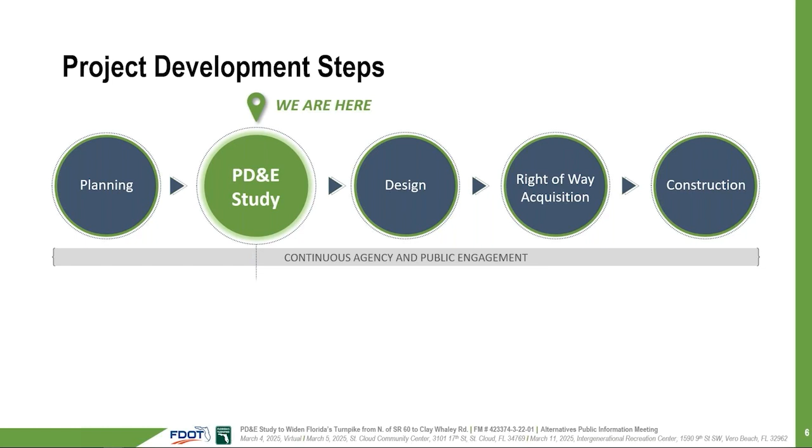The PD&E study is ongoing and is the second phase of FDOT's transportation project development process. Key components of the PD&E study include an evaluation of existing conditions, identification of future traffic needs, development and evaluation of project alternatives, and public and agency involvement. All findings and recommendations are documented at the end of the study.

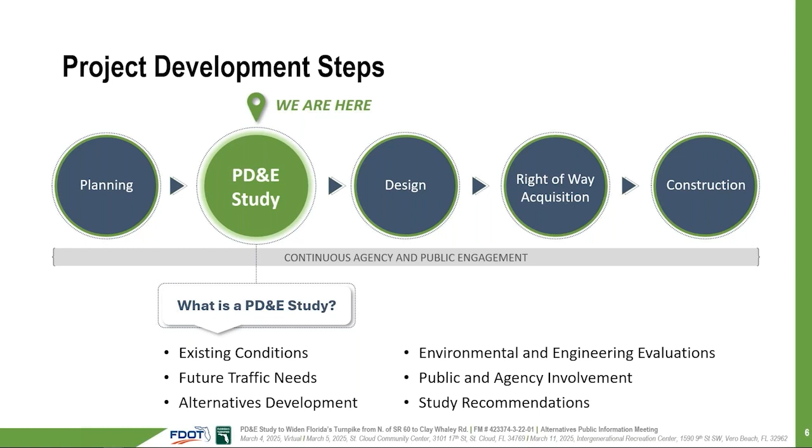Subsequent phases include final design and engineering, right-of-way acquisition, and construction. Right-of-way acquisition is not anticipated. The subsequent phases are currently not funded, but will be considered for funding upon the completion of the PD&E study.

This Turnpike PD&E study is located in Osceola County. The project begins north of State Road 60 and continues to south of Clay Whaley Road, from milepost 193 to 238.5, a distance of approximately 45.5 miles. The Turnpike mainline within the project area is currently a 4-lane limited-access toll facility, with two 12-foot lanes in each direction and a 40-foot barrier separating median.

The segment from State Road 60 to just north of the Canoe Creek Service Plaza is primarily rural, transitioning to an urban setting toward the project's endpoint. This section of the mainline features the Canoe Creek Service Plaza, passes through the Three Lakes Wildlife Management Area, and serves as a critical evacuation route for Florida.

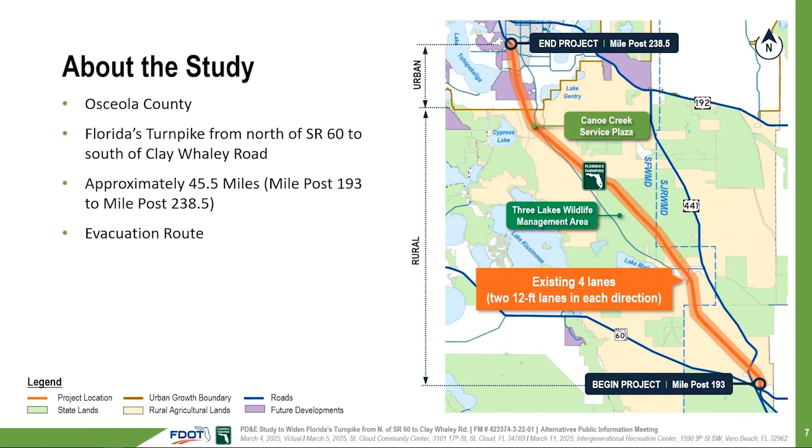This PD&E study is part of a larger network of improvement projects spanning both north and south of the project limits. Ongoing coordination with adjacent projects has been maintained and will continue throughout the duration of the study. This includes collaboration with the current PD&E study to the south, coordination with the Nolte Road Interchange Design-Build team, and a separate concept study that will analyze and document the potential location of a future interchange between Nolte Road and the future CFX interchange. Additionally, multiple coordination efforts have taken place with the Central Florida Expressway Authority regarding the potential future interchange for the Southport and Northeast Connector.

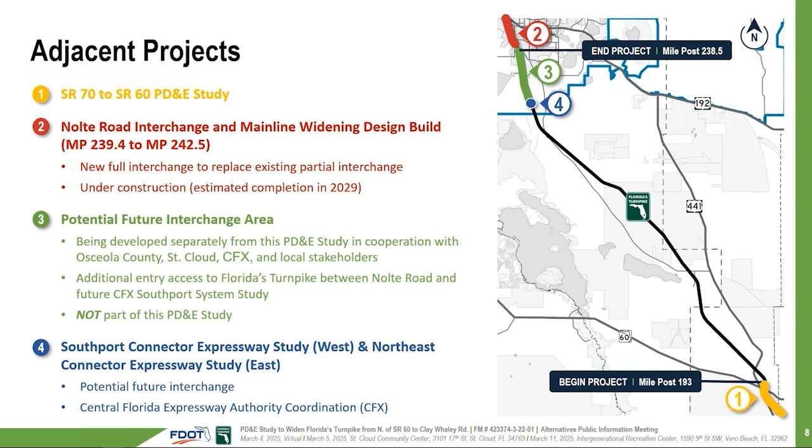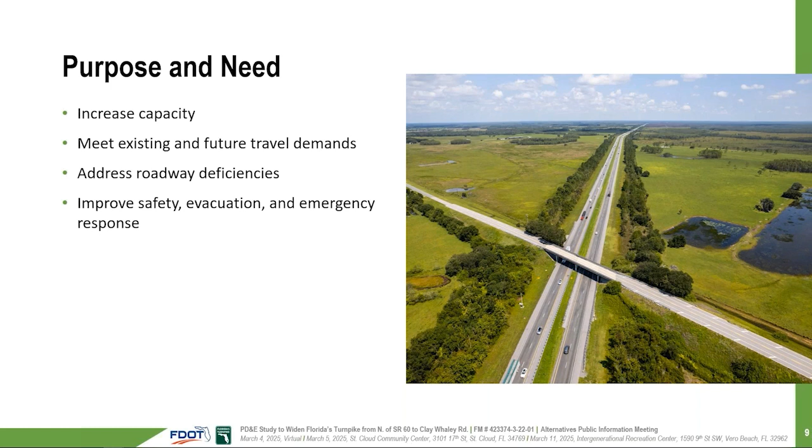The purpose and need for this study are to increase capacity, meet existing and future travel demands, address roadway deficiencies, and improve safety, evacuation, and emergency response.

An increase in capacity is needed to accommodate projected traffic volumes. In the rural segment, 3 lanes in each direction will be needed by 2045, and in the urban segment, 4 lanes in each direction will be needed by 2045 to meet traffic demands.

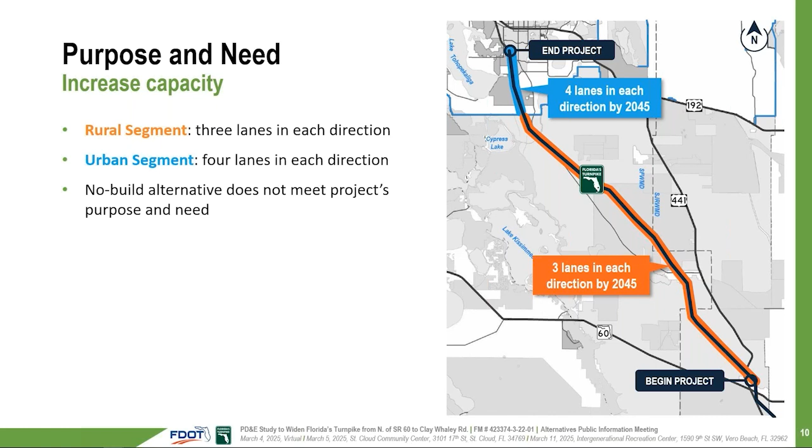The no-build alternative does not meet the project's purpose and need. If no improvements are made, an increase in the travel demand could result in more congestion and crashes.

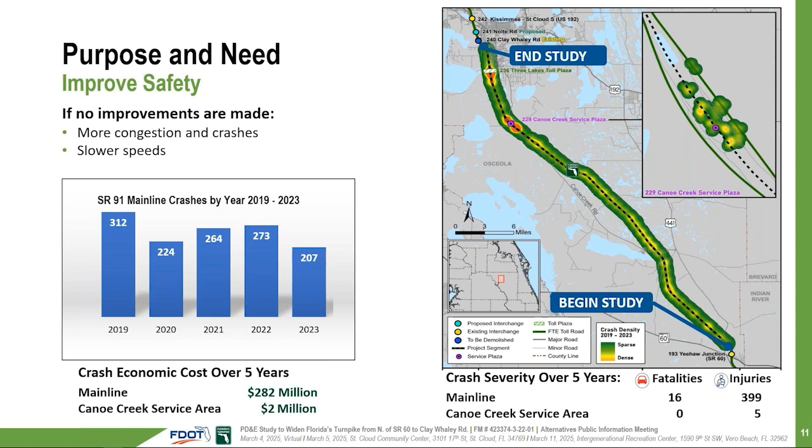Between years 2019 to 2023, there were 1,280 crashes along the Florida's Turnpike main line, which resulted in 16 fatalities and 399 injuries within the study limits. A total of 45 crashes were also reported within the vicinity of the Canoe Creek service area. The total crashes estimated economic cost within the study limit was about $284 million between years 2019 to 2023.

Florida's Turnpike serves as a vital component of the emergency evacuation route network, playing a crucial role in ensuring the smooth flow of traffic during evacuation periods. The enterprise is spearheading initiatives to improve emergency response times and enhance mobility during such critical events.

Solutions to address the project needs were developed and evaluated in coordination with the community, stakeholders, and local agencies' feedback, resulting in proposed improvements to the Florida's Turnpike corridor and additional structural and drainage improvements.

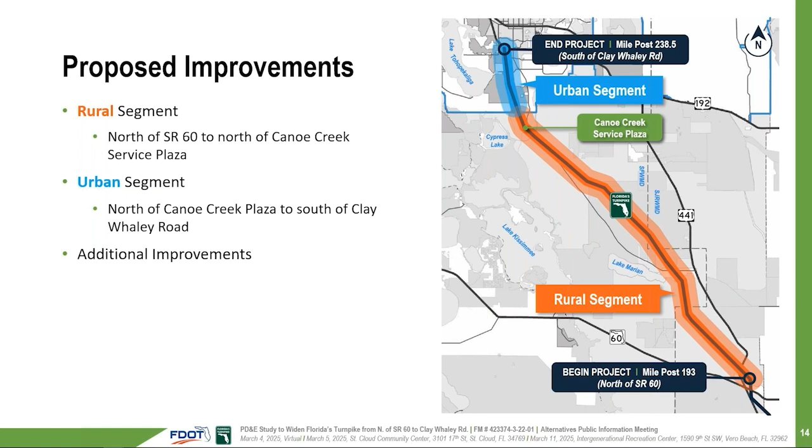We will begin by presenting the improvements along the rural segment from north of State Road 60 to just north of the Canoe Creek Service Plaza. Next, we will cover the urban segment from north of the Canoe Creek Service Plaza to south of Clay Whaley Road, followed by additional improvements throughout the project limits.

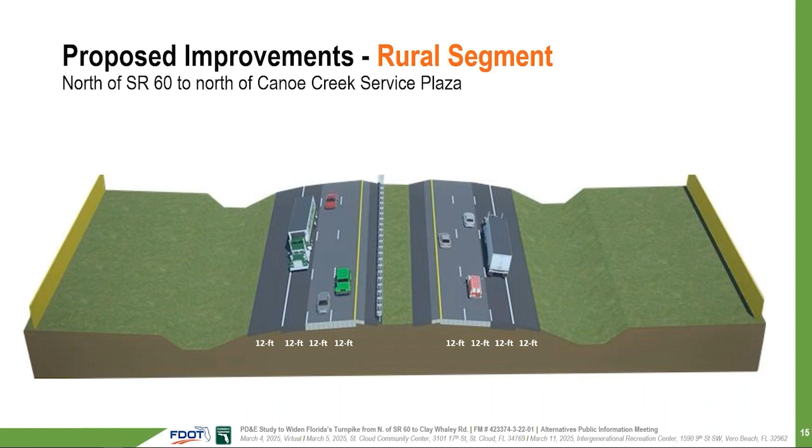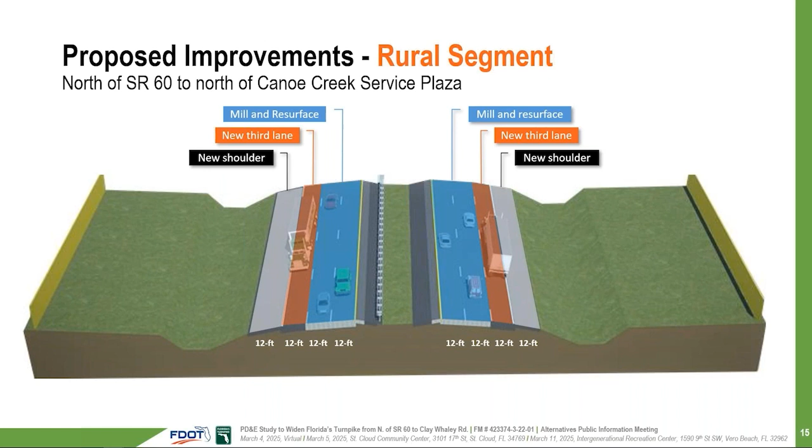The proposed improvements within the rural segment of the main line, from north of State Road 60 to north of Canoe Creek Service Plaza, include mill and resurface of the existing 2 lanes, addition of a 3rd lane in each direction, and the addition of a new 12-foot shoulder in each direction. The existing guardrail and median will remain the same. All improvements will be within existing right-of-way.

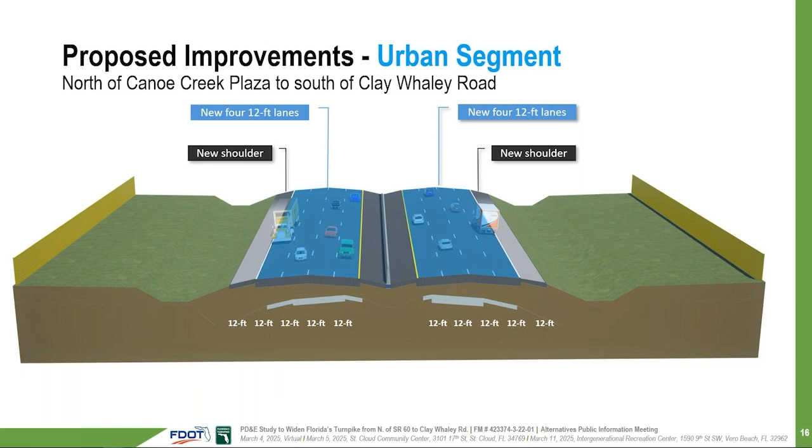The proposed improvements within the urban segment, from north of Canoe Creek Service Plaza to south of Clay Whaley Road, propose reconstruction of both directions of the main line to include 4 12-foot lanes in each direction, the addition of a new 12-foot shoulder in each direction, and the reconstruction of the median to include inside shoulders, a barrier wall separation, and drainage improvements. All improvements will be within existing right-of-way.

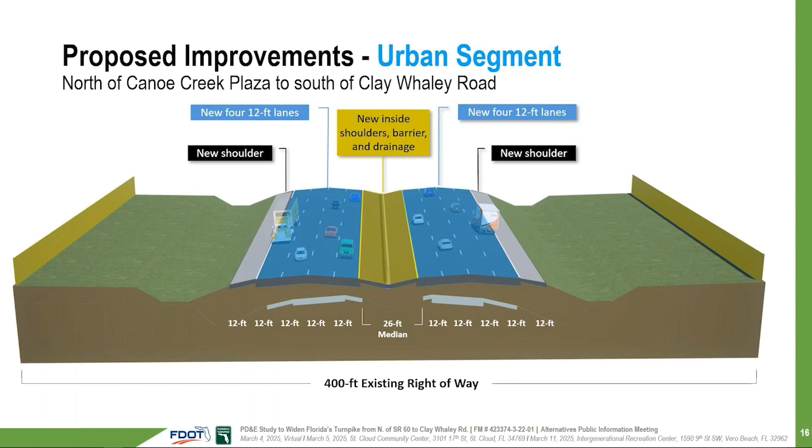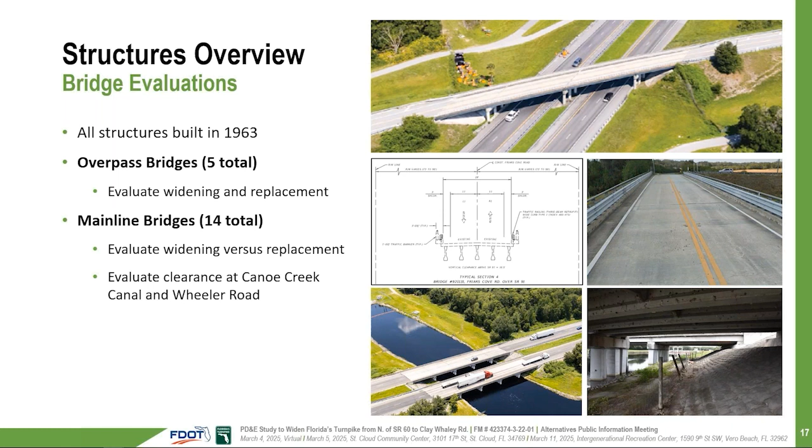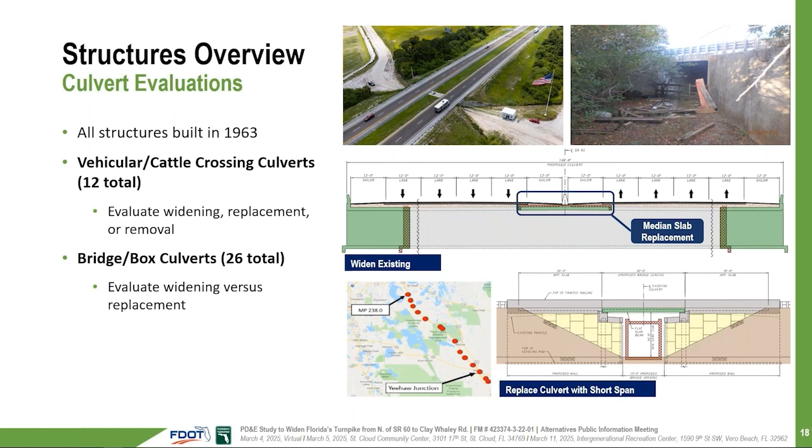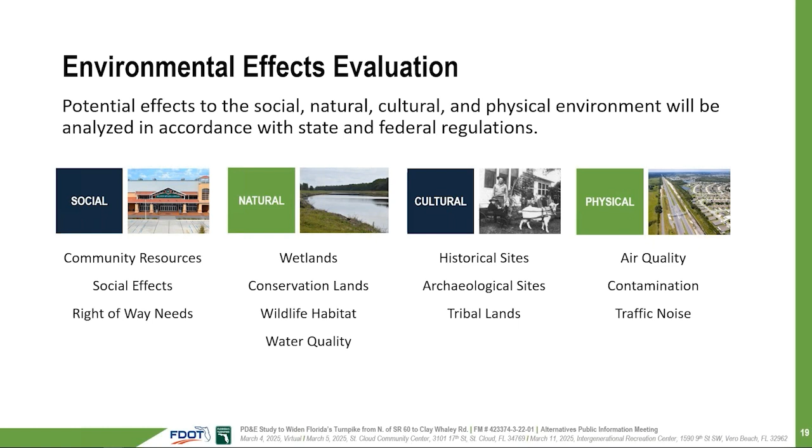The PD&E study is also evaluating the potential impacts and benefits to the social, natural, cultural, and physical environments associated with each alternative. Avoidance or minimization of impacts to these features is a key consideration.

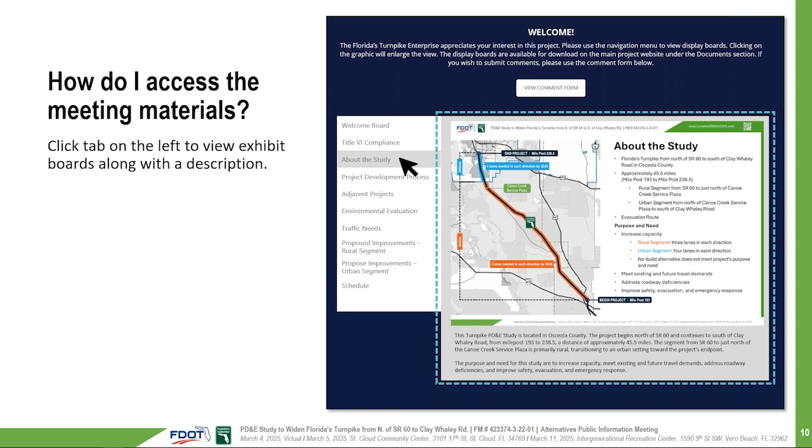Contact directly through email at greg.moore@dot.state.fl.us or by mail at P.O. Box 613069, Ocoee, Florida 34761. While written comments and questions are welcome at any time during the PD&E study, we encourage you to provide your comments regarding today's meeting by March 25th. Responses to comments will be addressed after the comment period closes on March 25th, 2025.

We will now get into some project-specific questions that will hopefully help answer some of the questions that you may have. Will a new interchange be part of this project? Florida's Turnpike Enterprise is currently conducting a separate concept study to determine the feasibility of a future interchange between Nolte Road and the future CFX Southport Connector interchange. When this study is complete, the information will be shared with Osceola County and local stakeholders.

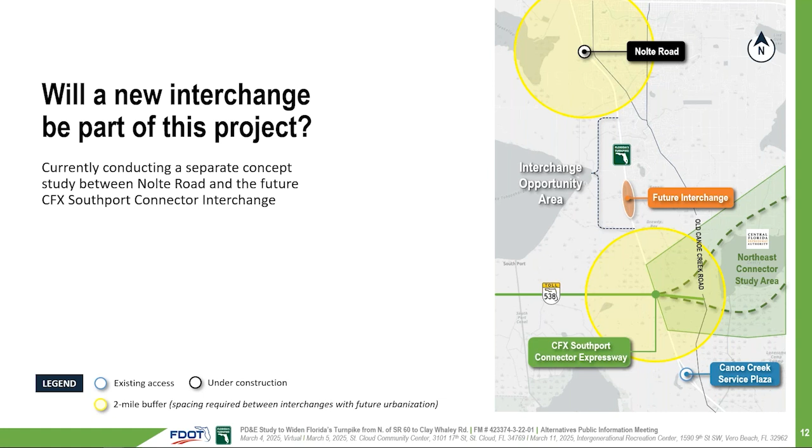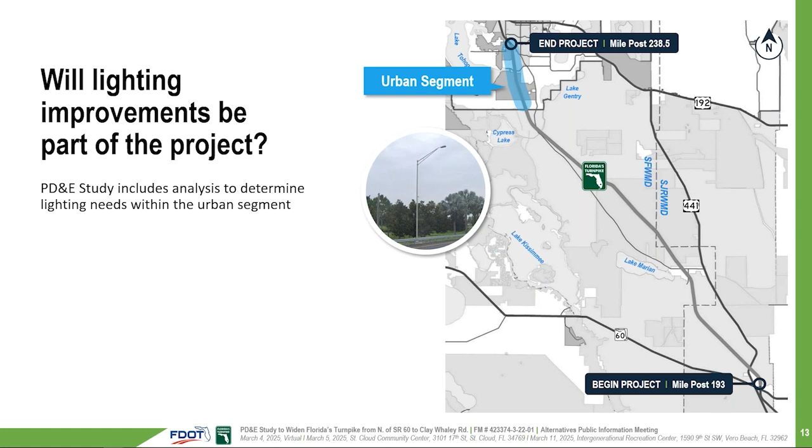Will lighting improvements be part of this project? The PD&E study includes an analysis to determine lighting needs in the urban segment of the project.

Will you build a noise wall for my neighborhood? A noise analysis will be performed on the preferred alternative for properties along the corridor, and the results will be presented at the public hearing. The hearing is currently scheduled for the fourth quarter of this year, 2025. For more information on the Turnpike's traffic noise policy and procedures, visit the project website and select the Videos tab under the Documents section. The video describes how traffic noise impacts are studied and evaluated for transportation projects to determine if noise walls could provide mitigation and meet applicable qualifying criteria.